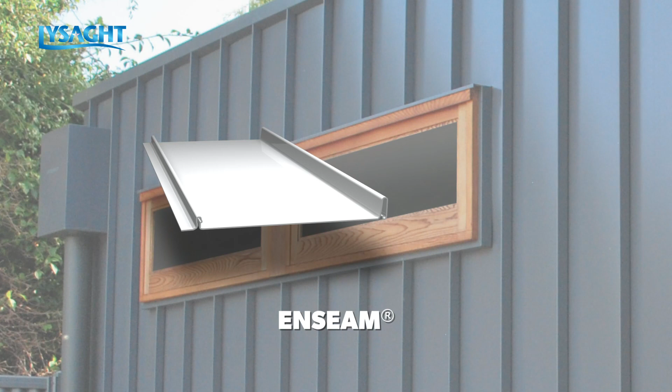LYSAGHT ENSEAM combines broad flat pans and a lower yet substantial rib to create a distinct visual dynamic in cladding. Its clean, good looks and easy style make it an ideal solution for contemporary architectural design. Featuring the striking linear appearance of ENSEAM, SNAPSEAM delivers improved performance attributes thanks to its concealed fixing system. These clips allow for enhanced thermal expansion and contraction, providing greater fixing security and allowing for longer lengths and greater spanning capacity.

This video will consider a common roofing and walling installation application for non-cyclonic regions. As part of the LYSAGHT Zenith range, these profiles are supported by the comprehensive Zenith Roofing and Walling Design and Installation Manual, which also has a cyclonic area variant. You will benefit from referring to this installation video and the detailed non-cyclonic manual together.

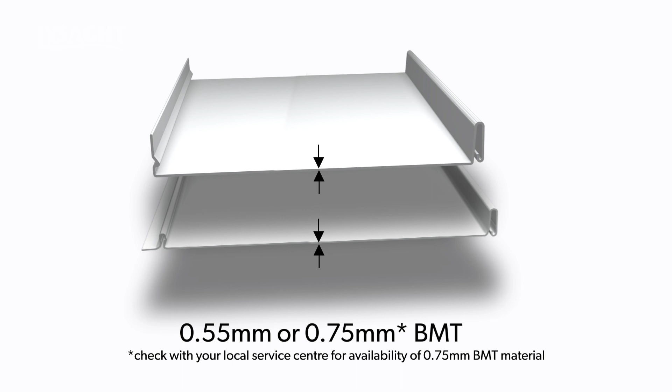LYSAGHT ENSEAM and SNAPSEAM are available in cover widths from 180mm to 465mm, with two standard sizes of 265mm and 465mm for maximum economy and efficiency. These profiles are available in a 0.55mm base metal thickness or 0.75mm base metal thickness for special projects.

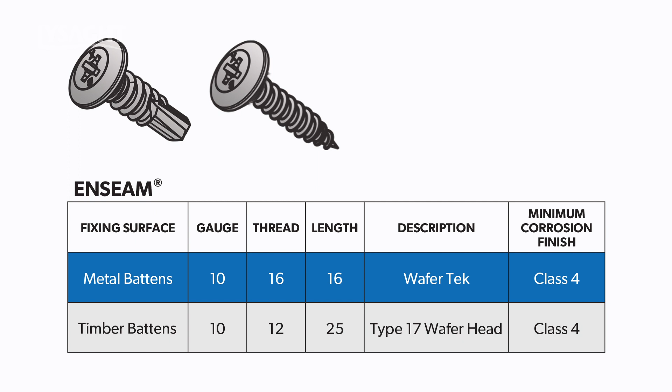LYSAGHT ENSEAM is simply screw fixed using wafer head screws into either steel or timber battens or structural ply backing, while SNAPSEAM is clip fixed to supports. This means that clips are screwed to the supports and no fastener passes through the sheeting. Fix the clips using flathead screws into either steel or timber battens.

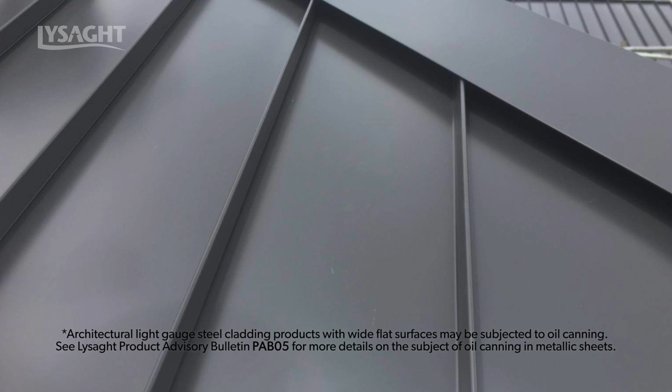To minimise the effects of oil canning, the ENSEAM and SNAPSEAM cladding is recommended to keep panel lengths under 8 metres. However, for special project requirements, longer lengths may be available subject to negotiation and minimum order quantities.

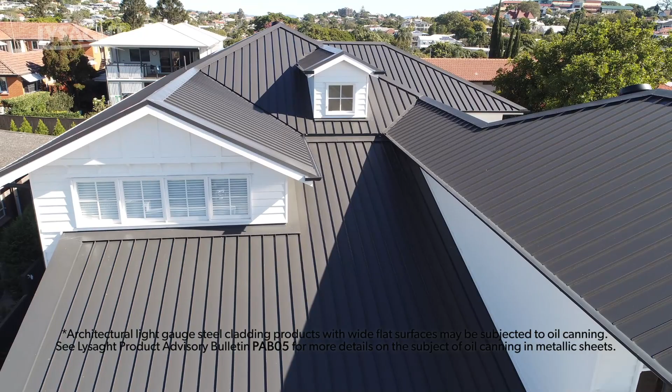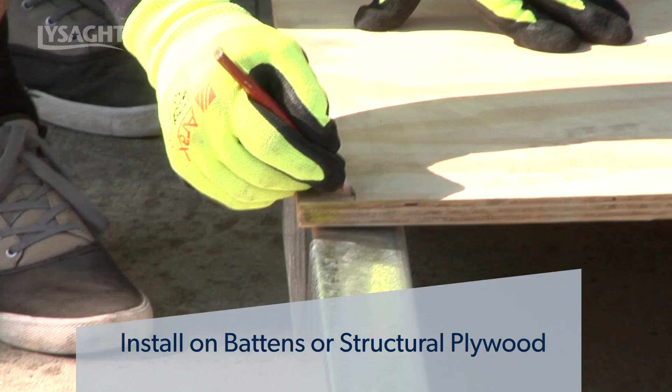Both ENSEAM and SNAPSEAM can be readily installed on either battens or structural ply membrane. For roofing applications, a structural ply membrane is required for both ENSEAM and SNAPSEAM cover widths greater than 265mm to provide adequate support for foot traffic during installation and maintenance. Install as per manufacturer's recommendations.

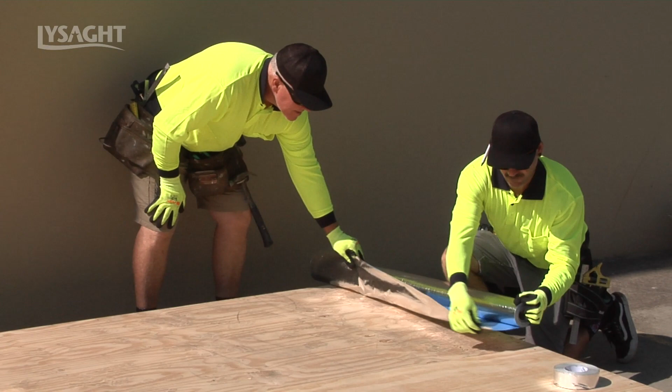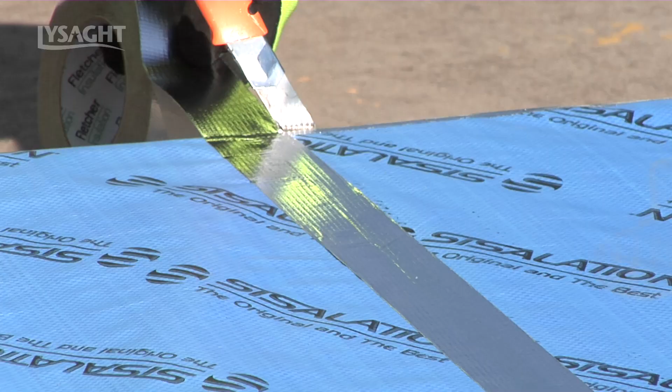It is good practice to install a heavy-duty roof sarking for both roofing and wall applications across all the LYSAGHT Zenith range profiles as an additional weatherproofing measure. Make all laps in the sarking with a 150mm lap. Tape with Sisalation tape on at least the outside face. Best practice would be to seal the lap with double-sided tape first. Ensure there are no ripples or puckers. Seal at the top. Follow the manufacturer's installation recommendations.

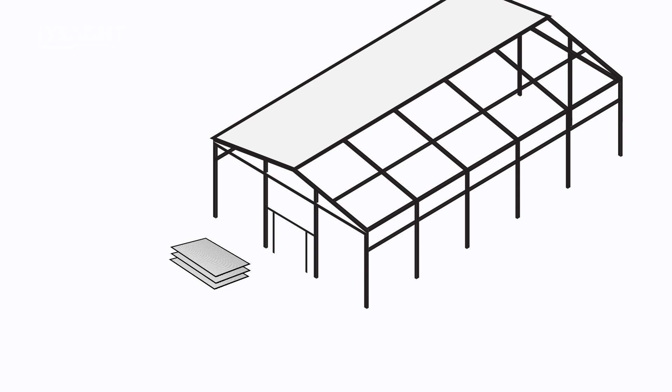For maximum weather tightness, lay sheets toward prevailing weather. Before lifting sheets onto the roof, check that they are the correct way up, and also that the overlapping side is toward the edge of the roof from which installation will start. You will find this much easier and safer than trying to turn sheets on the roof. Place bundles of sheets over or near firm supports, not at mid-span of roof members.

Order roof sheeting cut to the length of your roofing run, plus an allowance for overhang. For example, into a standard gutter, this may be 50mm extra. Design the pan width of the sheets to allow an even span across the roofing area, ensuring equal barge flashing widths.

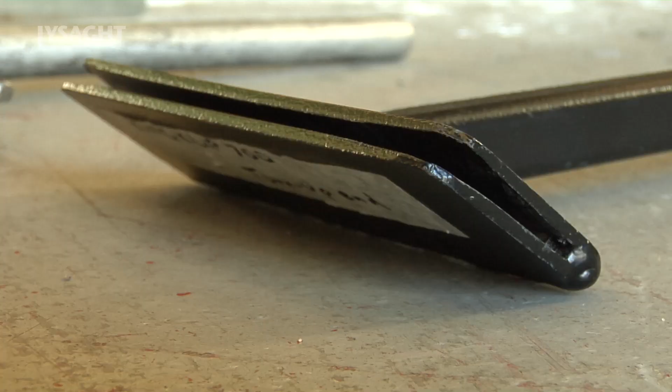As this profile is a variable width product, profile-specific turn-up, turn-down tools are not available from LYSAGHT. Select the most appropriate size tool for your pan width from the various size tools commercially available. To create the turn-up, at the top of the sheet, fit the tool over the end of the tray as far as it will go. Then push the handle to form a turn-up as close to 90 degrees as possible.

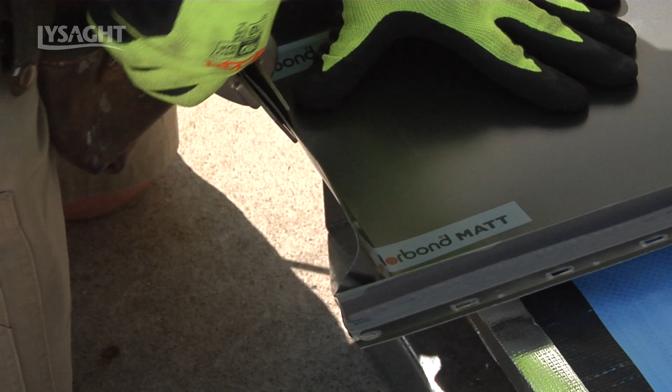Based on the width of your tool, you may need to gradually work the turn angle along the edge of the pan until the angle is achieved. Take care not to tear the corner edges of the turn-up. You can turn up sheets anytime. If you do it after they are fixed, make sure there is sufficient clearance to operate the tool effectively.

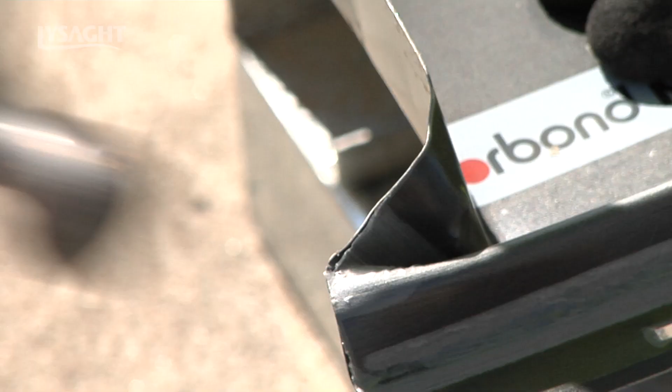At the gutter end of the sheet, turn down the sheet pan to approximately 20 degrees using the same procedure. Turning down is often done after the sheeting is fixed on the roof, providing there is no obstruction to the operation of the turn down tool.

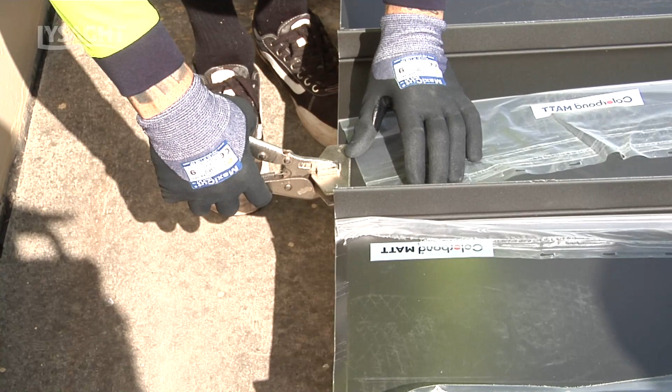Position the first sheet to align parallel with the building edge. To ensure that the barge flashings are equal on each side of the building, attention should be given to align the first sheet considering the roof run and sheeting cover. Set the planned guttering overhang, in this case 50mm.

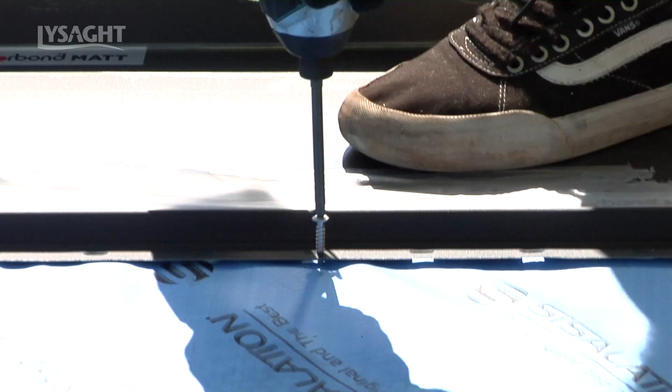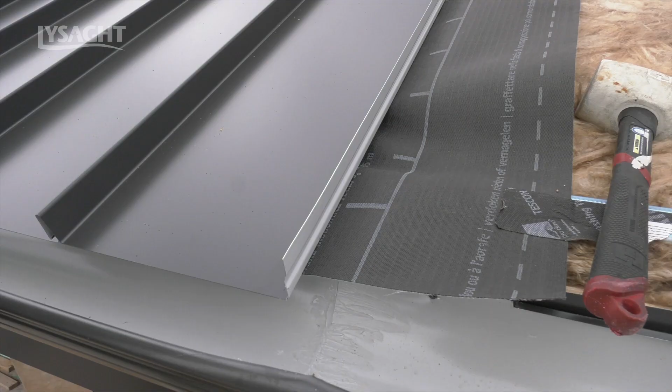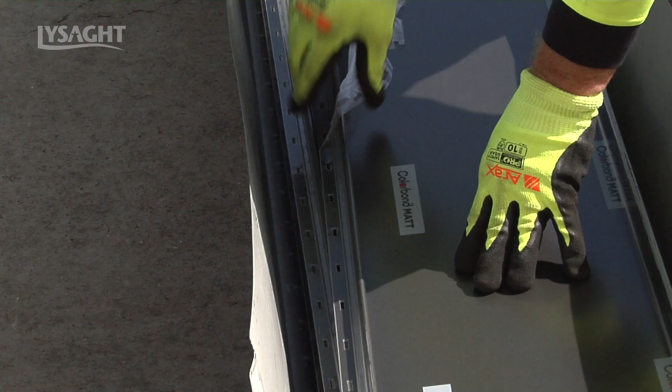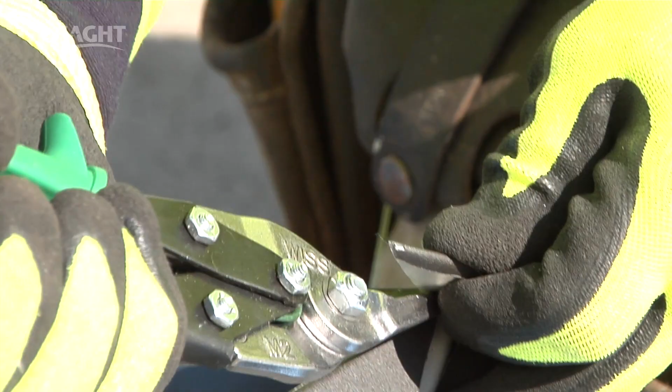Ensure to remove protective film from the edges of each sheet before fixing. Cut away the rib at the ridge end of the next sheet so that it sits neatly over the turn-up of the previous sheet. Align and engage the new sheet at the gutter end first.

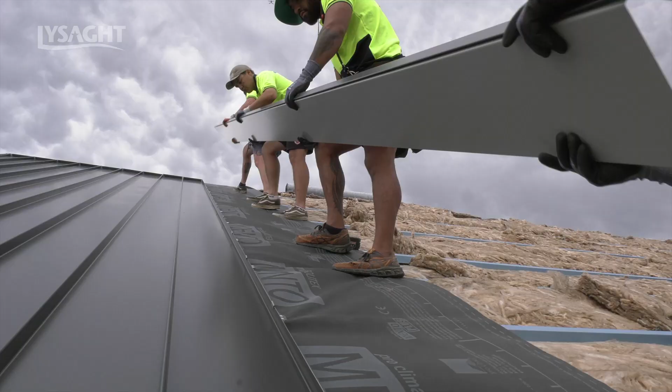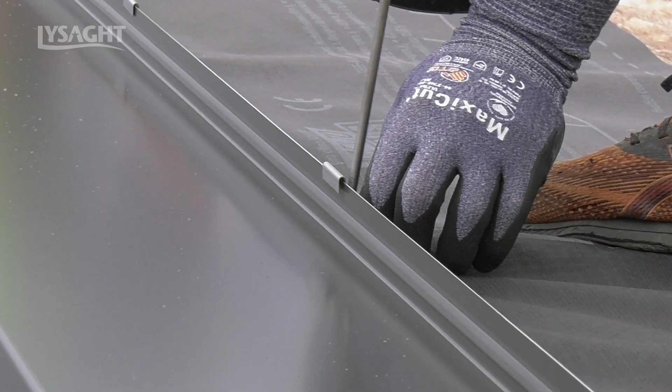Then click the ribs into place using your feet, a rubber mallet or hands protected with gloves. Screw fix or clip the sheet in place as before. Repeat this process for the roof run.

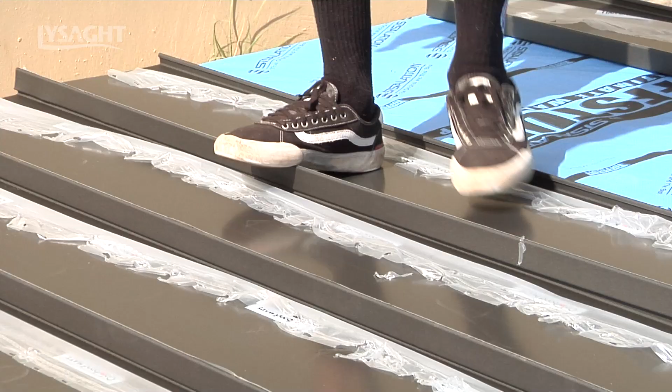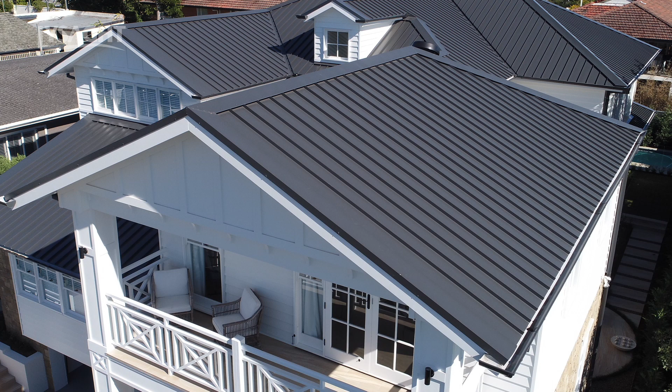For applications where the roof pitch is in between the minimum 3 degrees and 7.5 degrees, or where the roof run is greater than 5 metres, it is recommended that a bead of silicone is placed along the bend below the underlap rib prior to engaging the overlap rib, for end seam only.

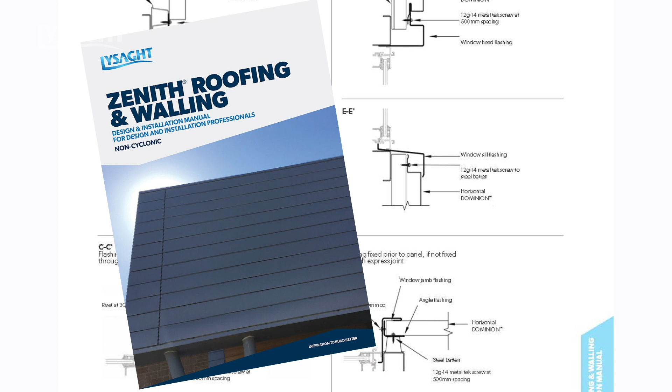To complete the roof installation, now fit the barge and ridge flashings. The process is the same for both snap seam and end seam. End seam is shown here. The Australian standards for design of flashings are referenced both in HB 39 2015 and the Zenith Design Installation Manual. Our manual covers the common roof flashing detail, including hip and valleys. LYSAGHT produce all of these and any custom flashings to suit your individual requirements.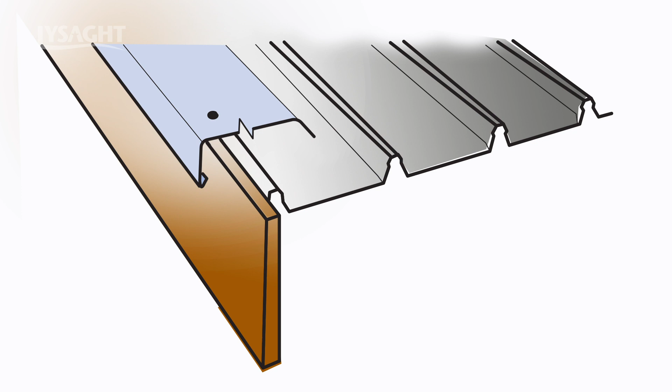The barge flashing needs to cover from the building external wall to over the sheeting first rib to provide a weather-tight solution. In situations where the barge top face exceeds 240mm, install a TOPSPAN 40 batten at the midpoint between the external wall and the first sheeting rib to support the barge capping.

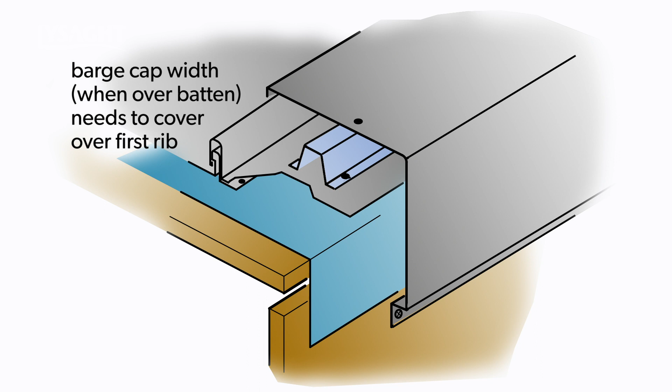Use screws with a neoprene washer to ensure the right amount of flex between the sheet and the batten. Remove swarf as you go to prevent scratches to the finished surface of the sheeting. The barge capping, in this instance, needs to fully cover the pan to create a dry pan. Otherwise, there is a potential for water ingress via the screw holes created by the batten being fixed.

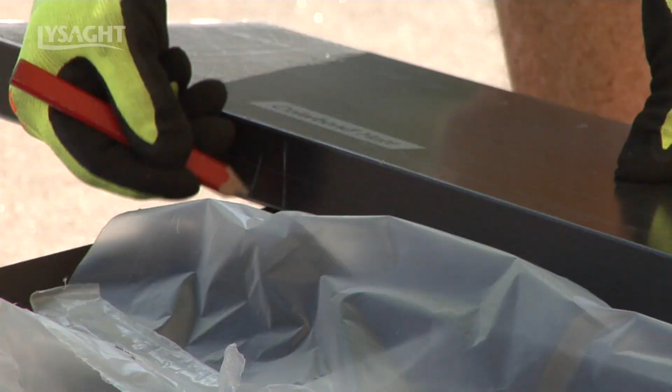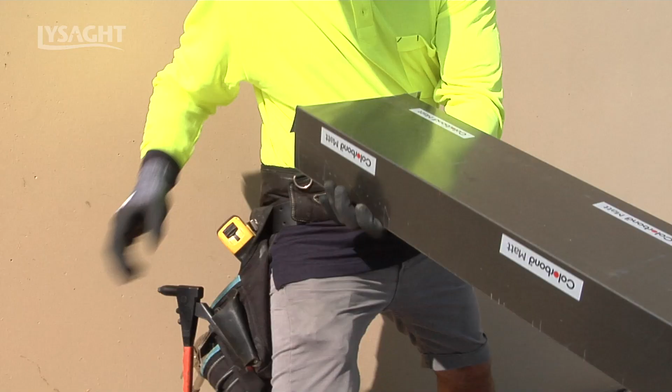For applications where capped ribs and field hemming have been utilised, the barge cap end can be similarly capped. Extend the barge 40mm beyond the edge of the sheet and then cut and fold the barge sides to close the barge end. With the gutter end in place, mark and measure the ridge end. Cut and fold the ridge end to allow fixing to the frame. Measure in where we're going to fix.

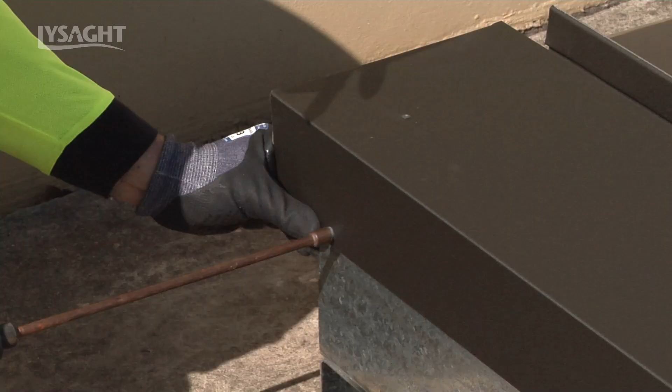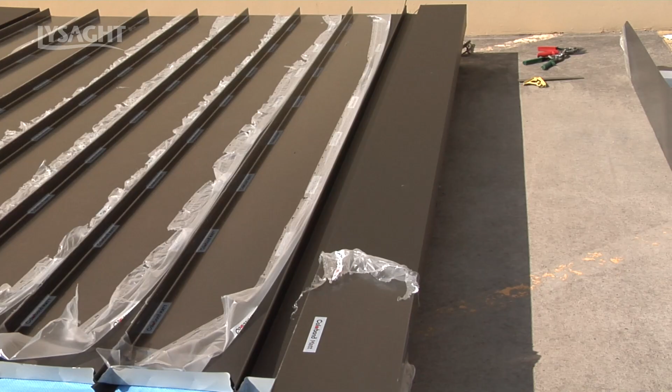Screw fix or pop rivet barge cappings to the roof sheeting and external wall at maximum 500mm centres. Once both barges are fixed, the next step is to install the ridge cap. Design the ridge cap to cover the top of the roof sheeting by a minimum of 150mm to allow the toes of the ridge flashing to sit well into the roof pan.

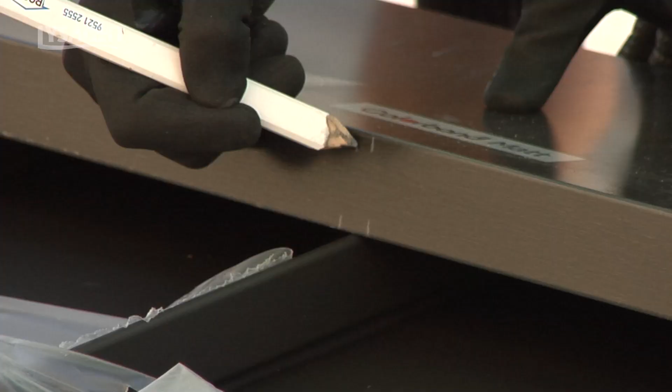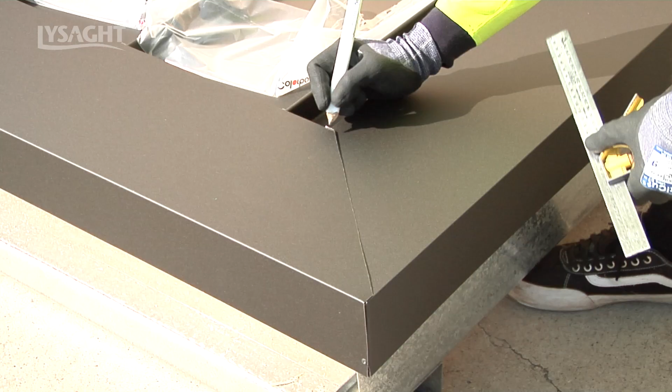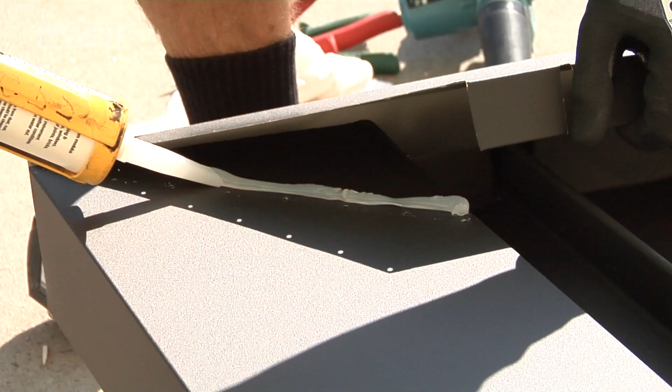Lay the ridge cap over the roof sheets in place and then mark and allow notching over the ribs and detailing around the barge top ends. Notch and cut. Ensure a good fit. Across the ridge barge junction, mark 40mm centres in preparation for drilling rivet holes. Remove swarf. Ensure a good silicone seal and rivet fix.

Drill and rivet fix each ridge. All longitudinal flashings need to be screw or rivet fixed at a maximum 900mm centres. The final task is to remove any protective film left on the sheets and give the completed surface an overall clean to ensure any potentially rust-staining swarf is removed.

We will now consider a roofing and walling installation, focusing also on a mansard roof detail. A feature of standing seam roof profiles, such as Enseam or Snapseam, is that the roof cladding can be aligned with the vertical wall cladding to create a seamless flow from roof to wall. This feature is known as a mansard roof detail. As the process is the same for both Enseam and Snapseam, we will just use Enseam in our demonstration.

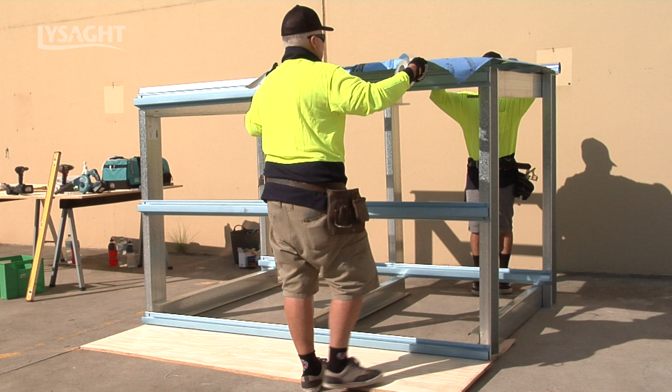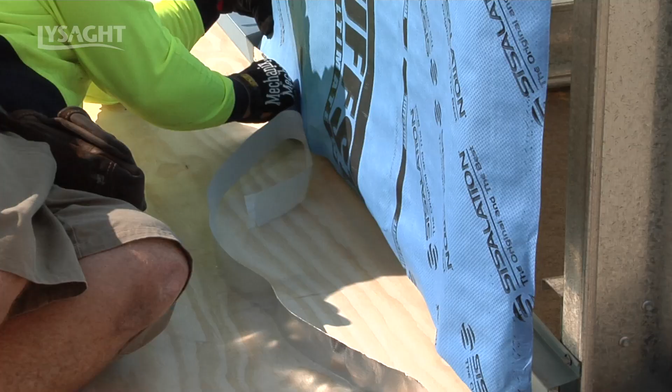In terms of sarking, look to cover the roof wall corner with a continuous roll of protective membrane. The rest of the process is as per standard roof or wall preparation. Install the sarking behind the wall battens or overply membrane and in accordance with the manufacturer's recommendations.

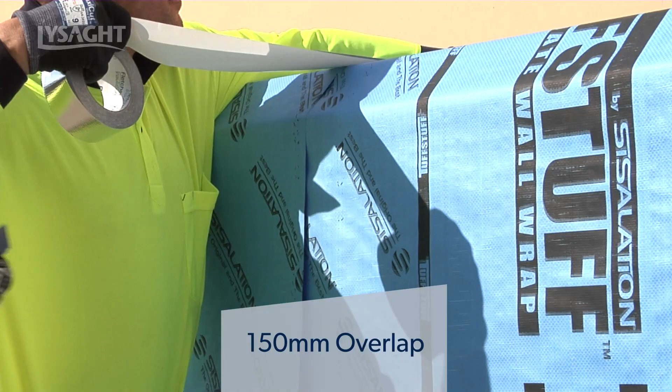Sealed at the top, free from ripples and puckers, lapped and taped at joins. Make all laps in the sarking with a 150mm lap. Tape with Sisalation tape on at least the outside face.

Be sure to plan your order of the Enseam or Snapseam sheeting, taking into account the visual placement of the seams. Design your sheeting width considering the area to be covered to allow for a symmetrical presentation of the ribs and matching width corner and barge flashings.

With the mansard detail, you will need to order your wall sheets over length to allow folding the pan and riveting to the first perpendicular roofing batten. Similarly, the roof sheets will need to be ordered over length to take into account the rib protrusions, 38mm over length.

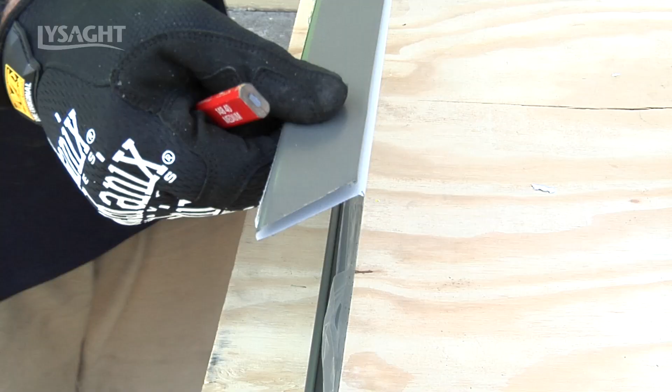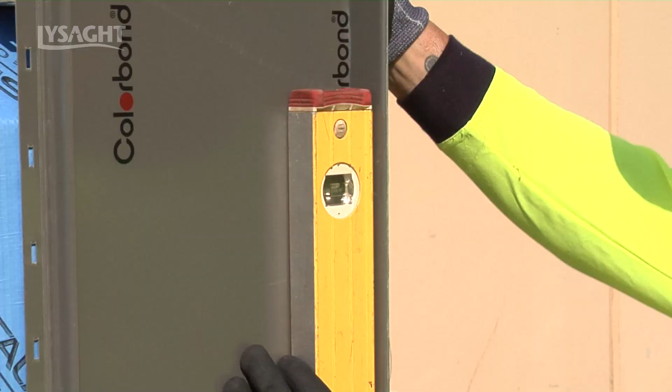First to be installed in place is the edge wall sheeting, and ensure the first sheet placement allows an equal corner barge flashing treatment. Ensure the wall sheet is sitting plumb. Mark the place across the back of the sheet to position the bend.

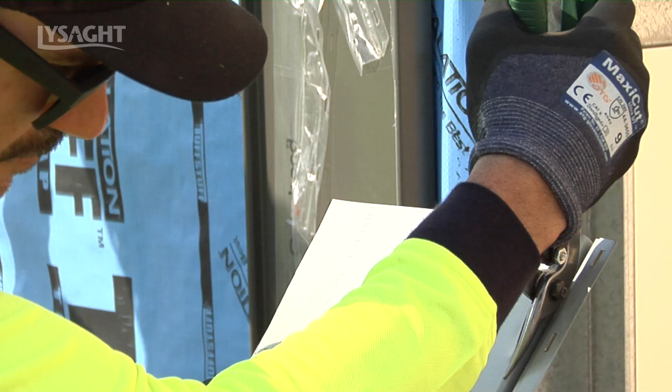The overlength top pans of the wall sheet are carefully cut alongside each rib to allow the pans to be folded to match the roofing pitch and can be fixed through the first perpendicular roof batten. Screw fix or clip the wall sheeting in place, double checking position and plumb.

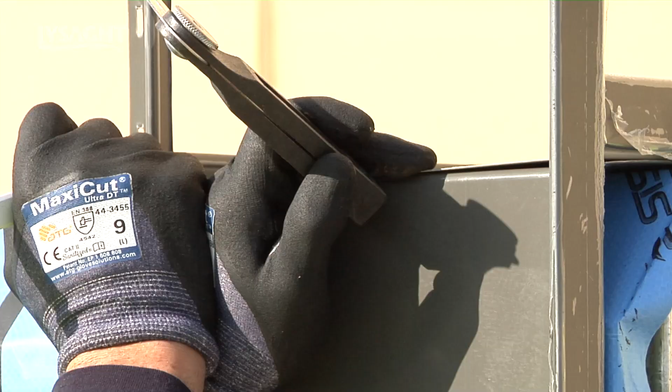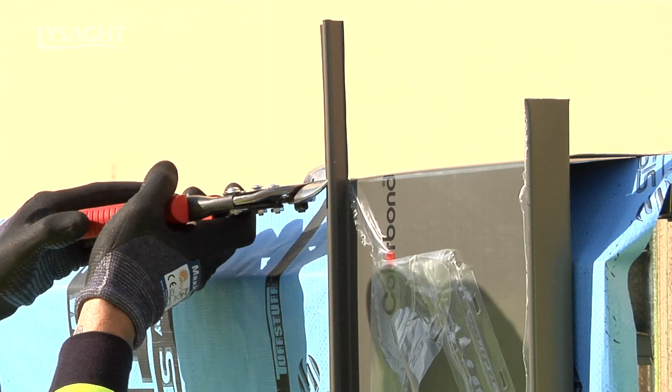Mark the height of the top of the roofing overlap rib against the wall rib. Mark the underlap rib to the bend height. Trim off the top of the leading overlap rib as per in-place marks. Trim the underlap rib to the bend height.

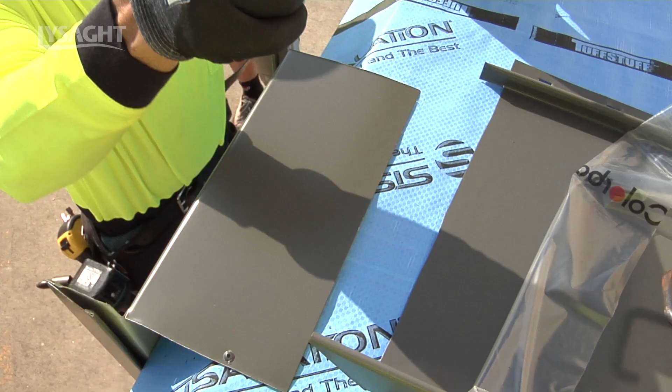Prepare the roof sheet, testing the fitting as you go. Trim the pan back to the ribs by the height of the rib, in this case 38mm. Trim the overlapping rib on a 45-degree angle, leaving the underlap rib to be trimmed in place. Check fit in place and trim further as necessary. Rivet fix the folded top to the frame.

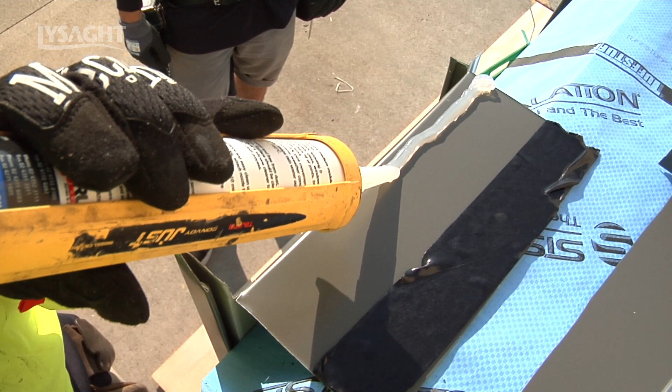Apply high-strength double-sided butyl sealing tape to the angled pans of the wall sheets, and also a bead of silicone sealant near the fold edge. Fit the roof sheet over the wall sheet. Pay particular attention to fitting the roof overlap rib over the wall overlap rib. If necessary, trim the underlap rib of the roof sheet so that it does not exceed the wall rib protrusions.

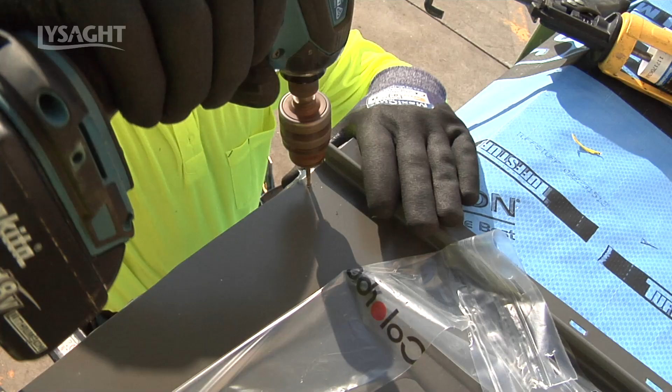Rivet fix roof panel pan at the wall fold pan. A rivet at each end of the panel pan is enough. Now rivet fix the roof overlap to the wall overlap rib on each side of the rib.

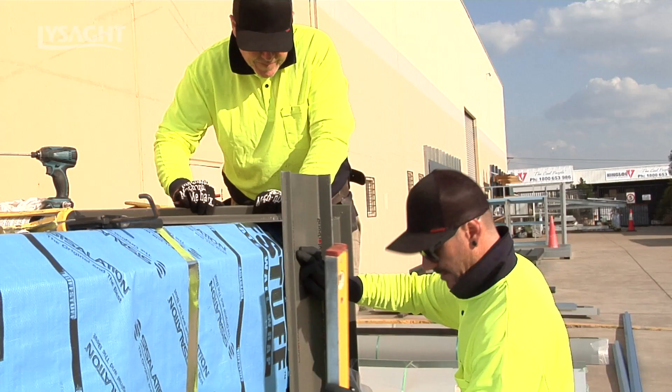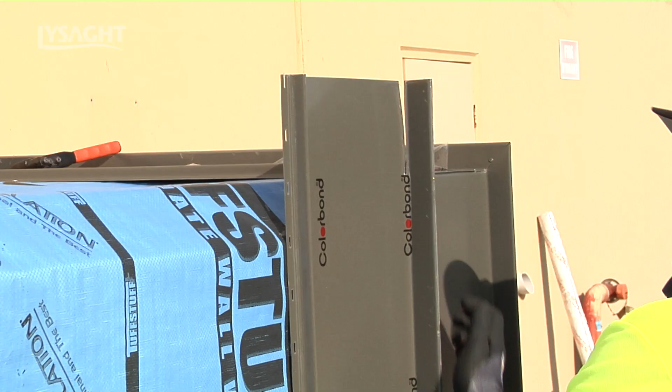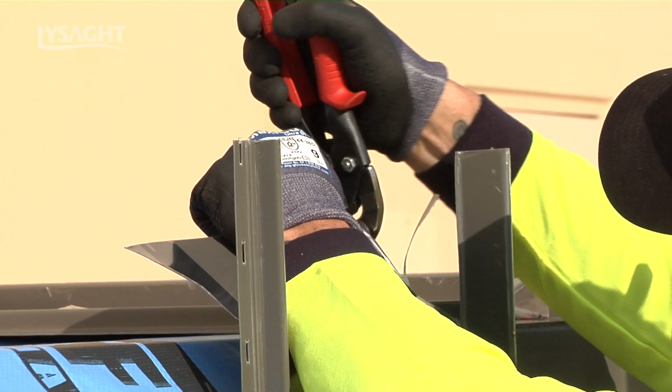Installing the remaining walling roof panels follows a similar process. It is important to check fit as you go. Mark the bend point in place with the roofing panel in position. Cut down the ribs of the walling panel. Pre-bend or bend in place to match the roof pitch. Trim bend overlap if necessary to ensure a flat fit. Screw fix or clip your wall panel to the frame.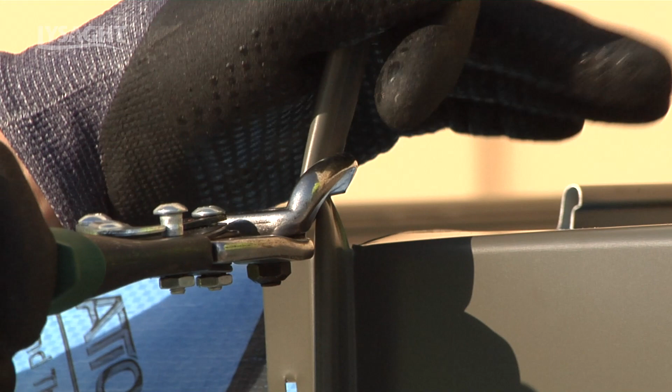Measure, mark and cut roofing panel to ensure the correct overhang of the ribs. Cut 45-degree angle on the overlap rib end. Trim underlap rib so they will be able to accept the overlap rib of the next set of panels. Mark and trim the wall panel overlap rib to the roof panel's overlap rib height.

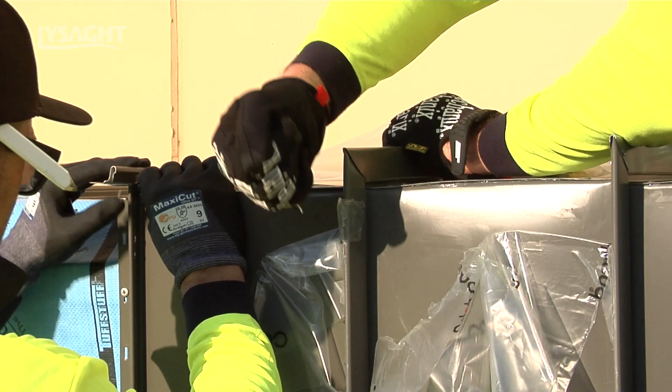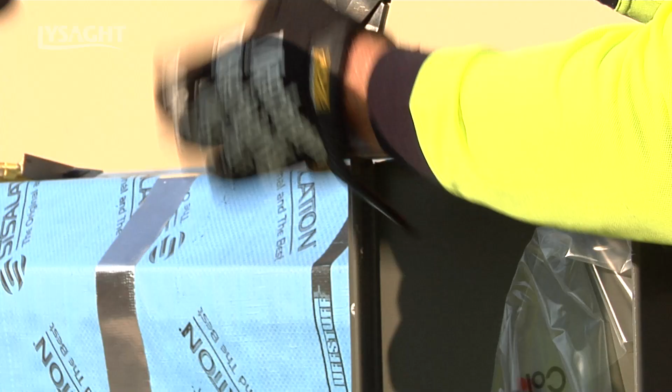Now fine-tune the roof panel's overlap and fit. Trim the roof panel underlap rib to create a corner with the wall underlap rib. Tape, silicone and pop rivet roof panel in place.

Pop rivet roof overlap rib to wall overlap rib. Continue this procedure for the roof walling run.

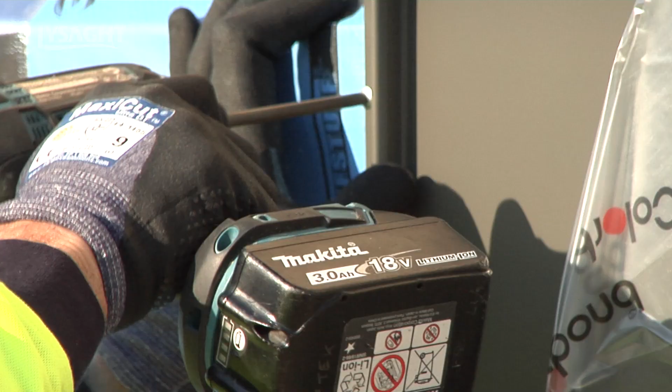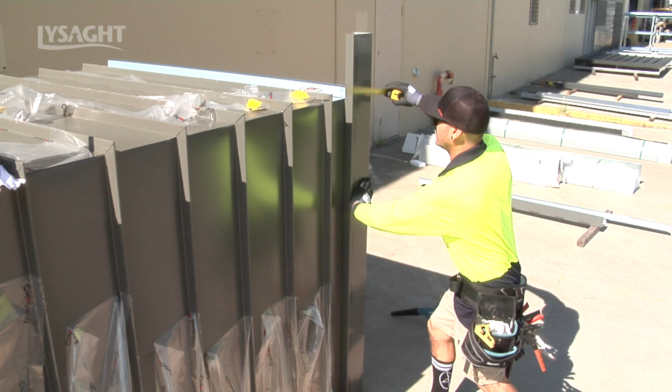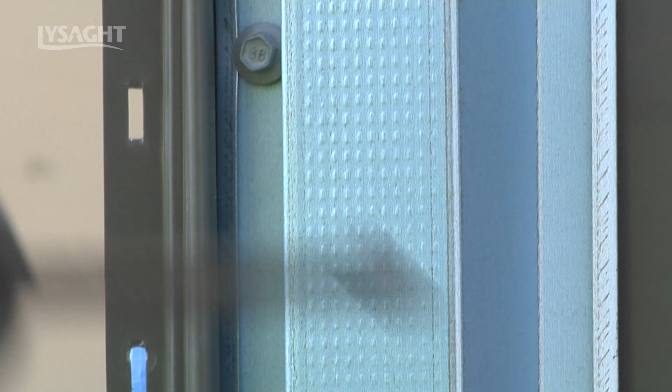Let us consider walling and barge flashings as one process. Set up the vertical cap before the barge. In situations where the corner top face exceeds 240mm, install a top span 40 batten at the midpoint between the external wall and the first sheeting ridge to support the corner flashing. Use screws with a neoprene washer to ensure the right amount of flex between the sheets and the batten.

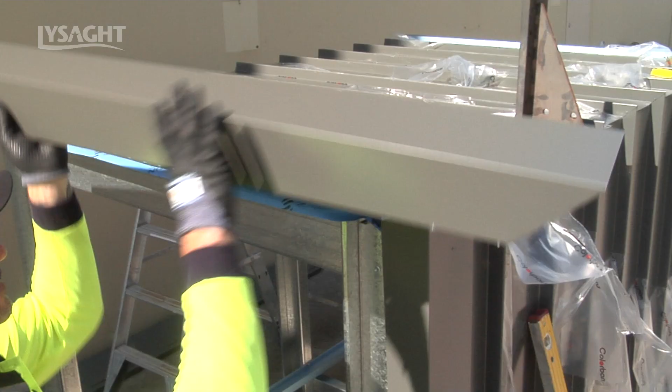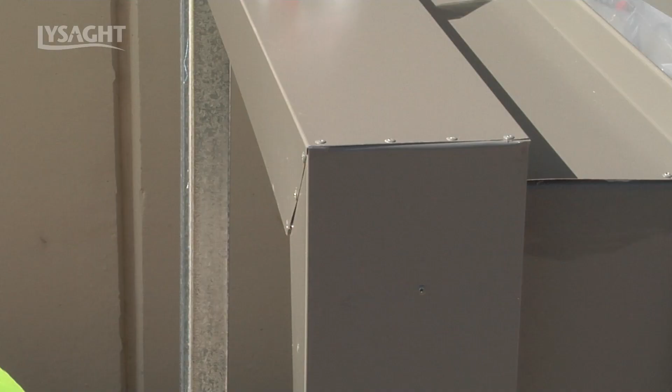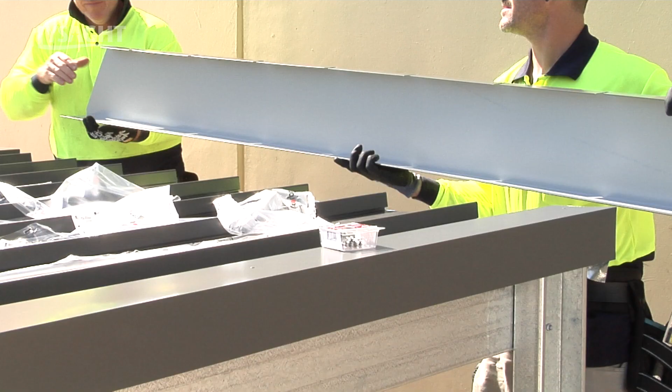Create a fold at the top end to allow for riveting the corner flashing to the roof batten. Complete roof flashing detail as outlined earlier. For greater detail on the ridge capping process, refer back to earlier in the video.

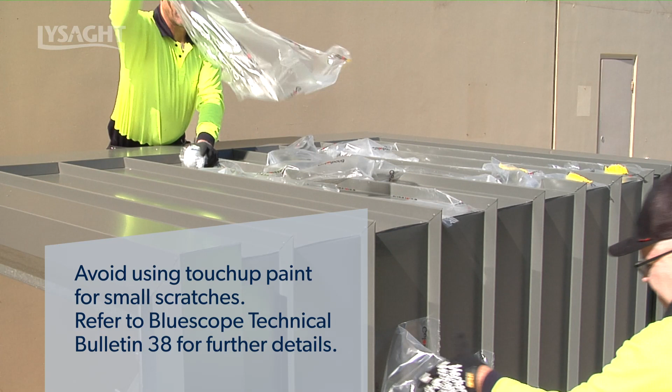The final task is to remove any protective film left on the sheets and give the completed surface an overall clean to ensure any potentially rust-staining swarf is removed.